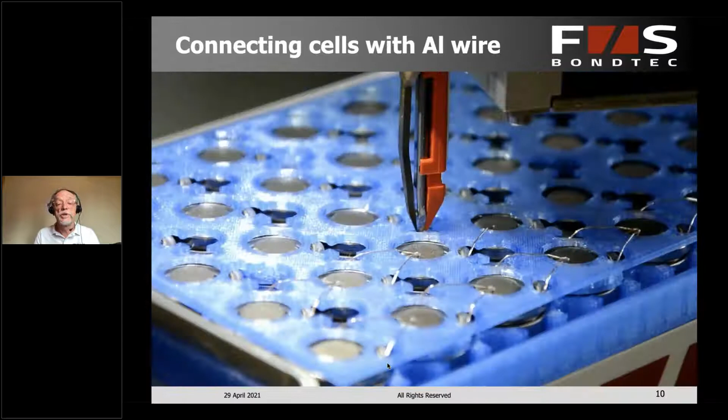recording shown here. What this machine does is almost a little bit like a sewing machine. We push down, make a wire connection to a second point and cut off the wire. And in the short times where this bond tool, as we call it, pushes down, we actually make the welding connection to, in this case, the battery top. That's the bonding step, as we call it.

Now, why are we so fond of wire bonding? Well, it's extremely flexible because you do not need a prefabricated connector of any kind. We just use the wire or the ribbon in whatever length and whatever orientation you need it. You just program the bonder to go from spot A to spot B, wherever that is. So if you have a different module to make or the design of your module changes, and those are typically things that happen as you start out when you have to make very small sample quantities, all you do is reprogram the bonder. You do not need to wait for extra parts or something new.

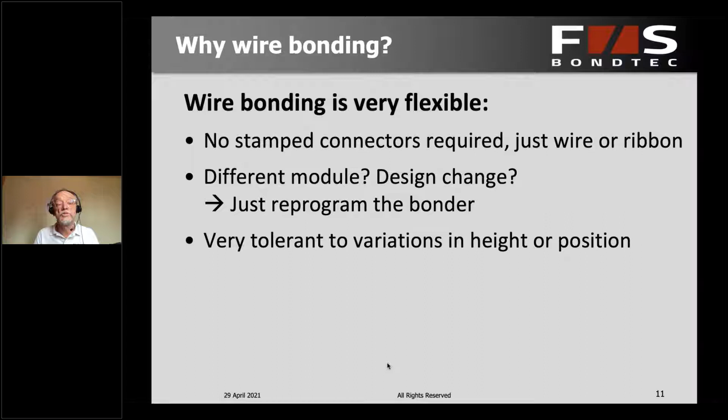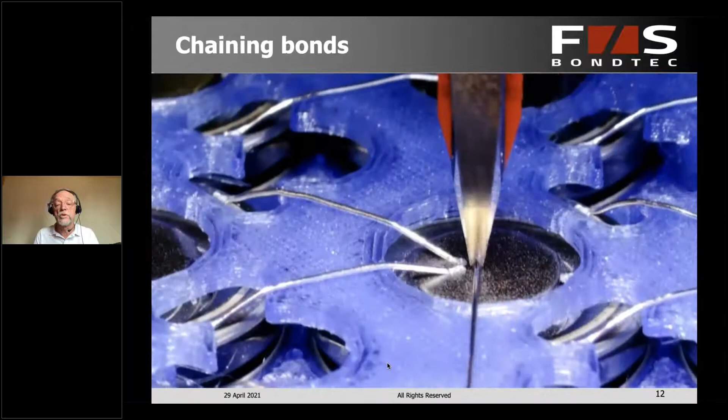Another nice thing is the machine and the process are extremely tolerant to variations in the position of the cells or also in the height of the cells, because the bonder will simply react to that by itself. What we see here is a chaining process. And as you can also see, we do not only connect a few cells in series, we can also make more than one wire, depending on the kind of current we want to conduct. So this is all very straightforward.

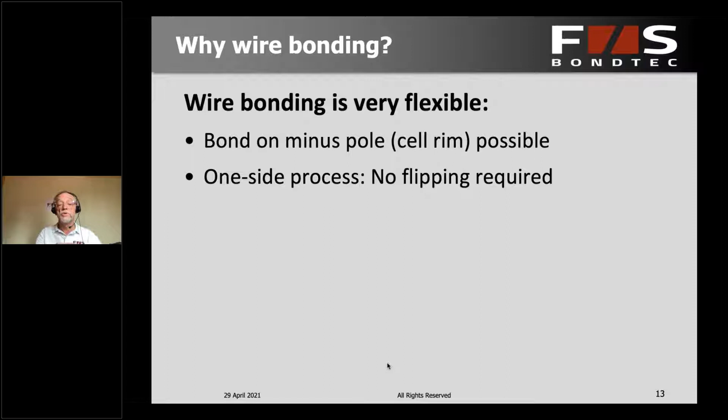You can even do things like making the second bond on the top side on the cell rim as well. So you can bond both poles on the same side of the module. And that is interesting because you don't have to flip the module around once you start it. You can also make a fairly low module because you only have connections sticking out on the top side. And the entire rest of the cell body is free if you want to do some kind of cooling or other thermal management. So that gives you extra design flexibility.

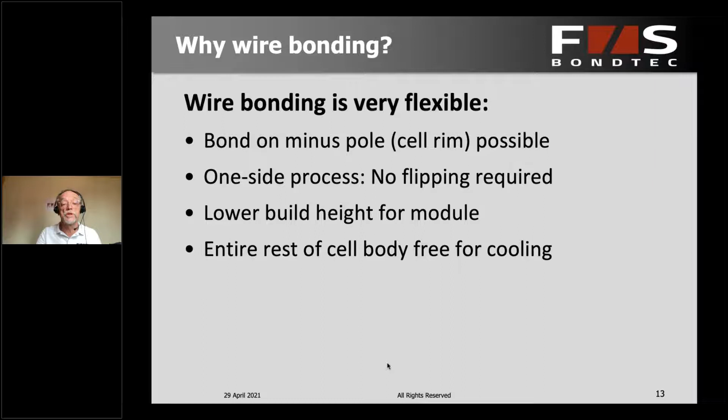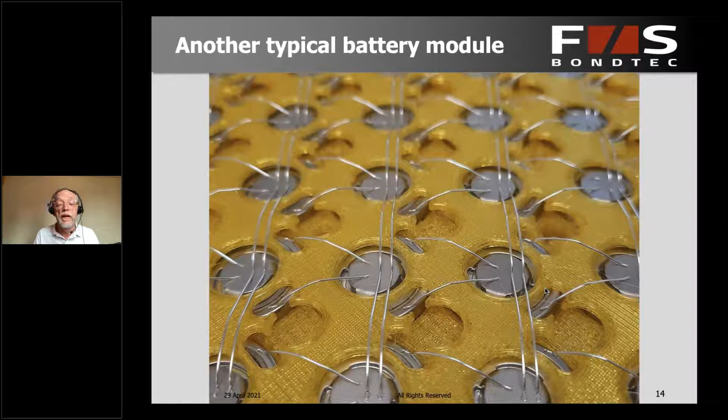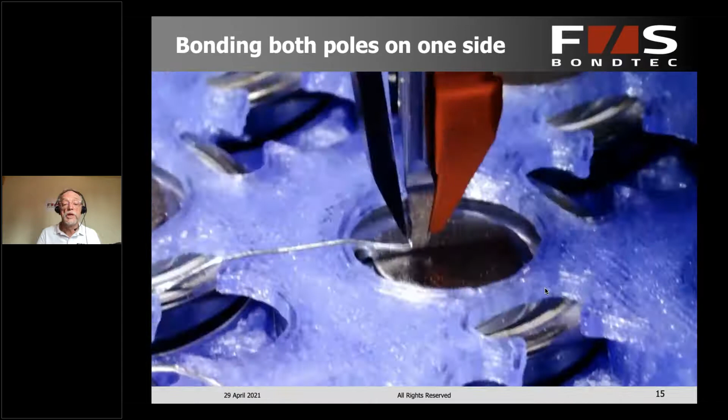In a case like this, where you can see another module that we've shown here, we have the two connections from the plus pole and an extra connection from the rim to a plus pole. As you can see here, you see the bond running from the rim to the neighboring plus pole. And of course, here we have a much smaller area where the bond has to go on the rim, and the rim is in addition bent and curved.

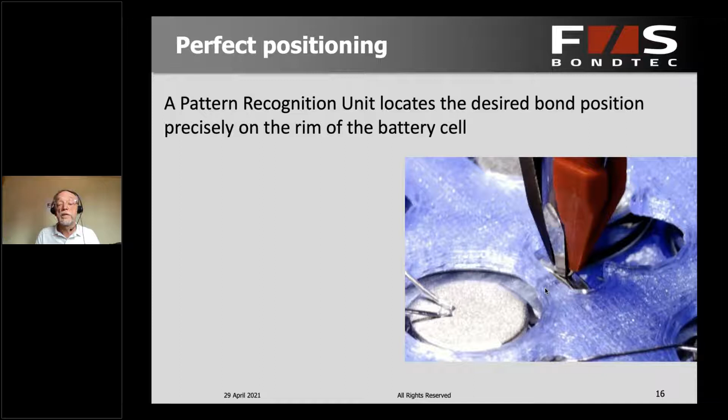But we can get around this problem because we have a pattern recognition unit in the bonder that allows us to locate the bond position very, very sharply and very precisely on the rim of the battery cell. In fact, if you look here on the left, you see the camera image from the bonder itself that shows us just what we are doing and where the bond itself is being located.

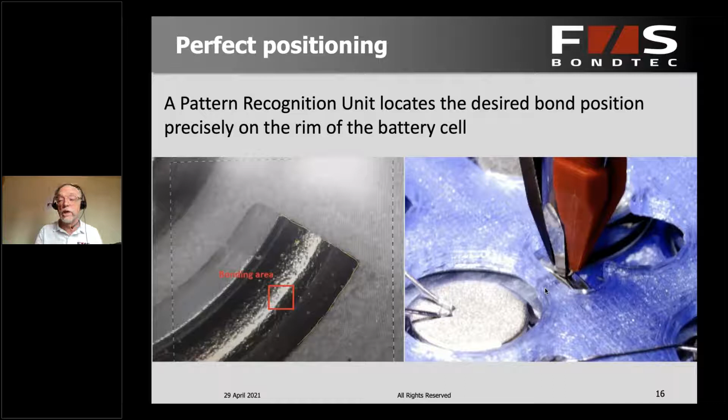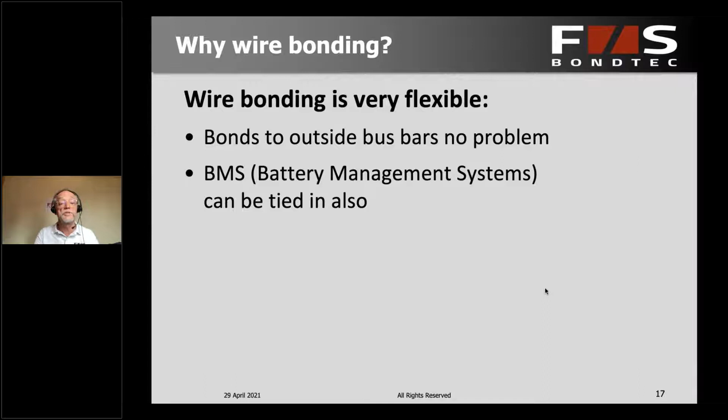So we can even bond, of course, outside the cells. We can bond to bus bars without any problems, or we could tie in additional circuitry like a battery management system that does not have to be at the same level. And here, as you can see, we can bond outside to a bus bar that will take the current off these plus poles. And you see we're making 2 wires each to get more current through.

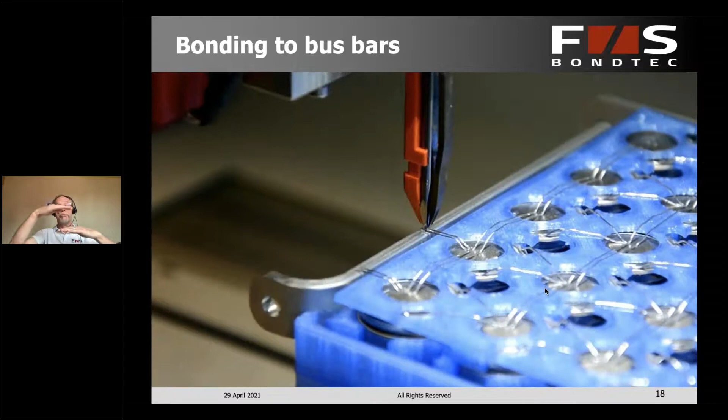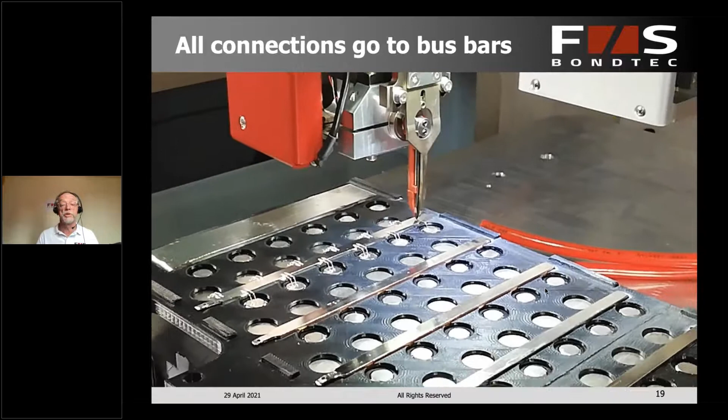A battery management system could be at a higher level above the battery cells. That's also no problem for a wire bond to get to. And again, no matter what the connection is, whatever the bonder can reach, you can bond to. Here you see a different type of battery cell module where we have only bus bars to connect to, not cell to cell, but bus bar. That's just a question of the design you like to use.

I was talking about the currents you can carry here, and indeed, if you use an aluminum wire, which is kind of a standard, most frequently used, of about 400 microns diameter, you have a fusing current of something like 25 amps in this case, and as you can see from the diagram to the left, this could be higher if you use different types of wire, such as copper or copper core wire. Typically, of course, you would derate the current well below the fusing current. So in our experience, a lot of people use something like 10 or 12 amps for a typical 18650 cell.

Obviously, if you want higher currents, you could use different materials. As I said, you could also use ribbons, or of course, the simplest way is simply to make more than 1 wire. 2 wires is actually quite frequently used, and that gives you the typical 20 or 25 amp current rating that you may need.

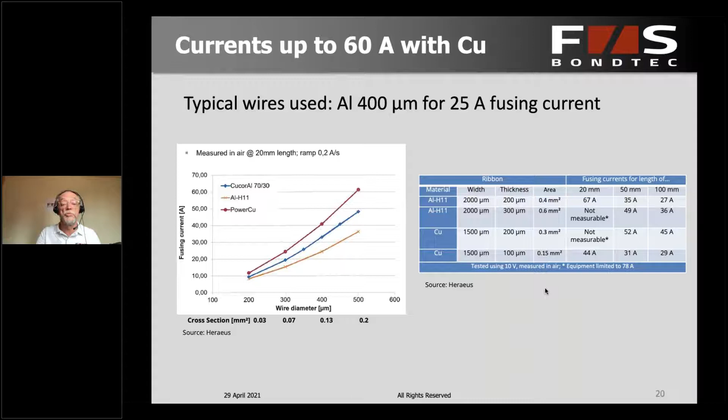Now, a little bit more about the technology. What's so advantageous about wire bonding and why is it so useful? Well, technically, it's a welding process that happens in the solid phase, and it happens by friction. So the crystal lattices of the wire and the substrate are brought into atomic contact and form a metallic bond without any molten phase. That's the important thing to remember.

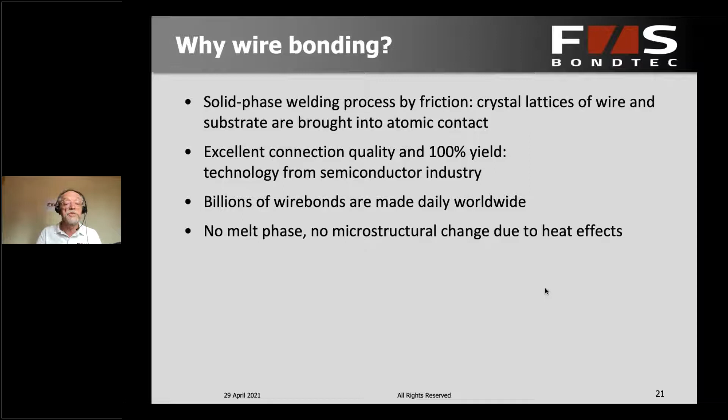The connection quality is really, really excellent, and typically we have a first pass yield of 100%. That's not so surprising because the technology really comes from the semiconductor industry, where extremely high quality and high yields are just the basic requirement. Billions of wire bonds are made every day worldwide, so this is a huge industrial process that's very well understood. As I was saying, we have no molten phase, so we have no microstructural change inside because of heat effects, and that's a big advantage.

But we also have a bulk joint. We have no interface between the two materials that could corrode or get contaminated. It's really corrosion proof, and that's why it easily lasts 20 years. In fact, in your regular car, you have several hundred wire bonds with this type of heavy wire in the electronic systems that will easily last many years. And as an additional bonus, if one of your cells fails, you can easily replace it because they are repairable.

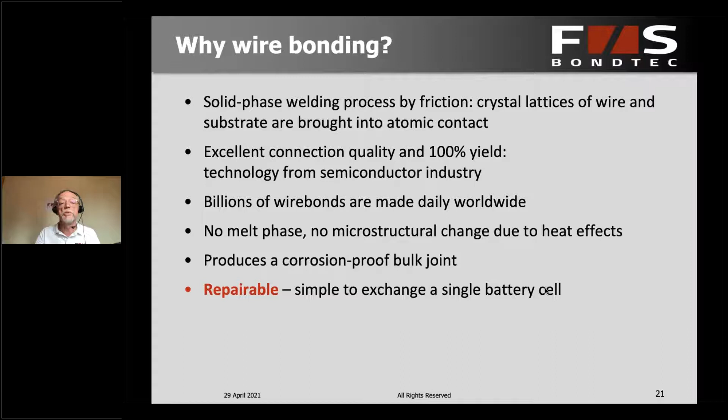So that's the reason why, for e-vehicles, at least for those with cylindrical cells, just like Tesla's, wire bonding is by far the most popular connection technology. It's also quite fast, as you saw from the videos. The typical connection speed is something like 1 second per wire, and it's relatively cheap. Depending on the volume, you could count on something like a cent or so per wire connection, depending on the length of the wires and so on. But that's a good rule of thumb to use.

Now, of course, there are other methods. I won't go too much into detail about what's good about them and what's not so good, but resistance welding is really a classical starting technology if you start out small, because you can start with a manual entry-level solution quite easily.

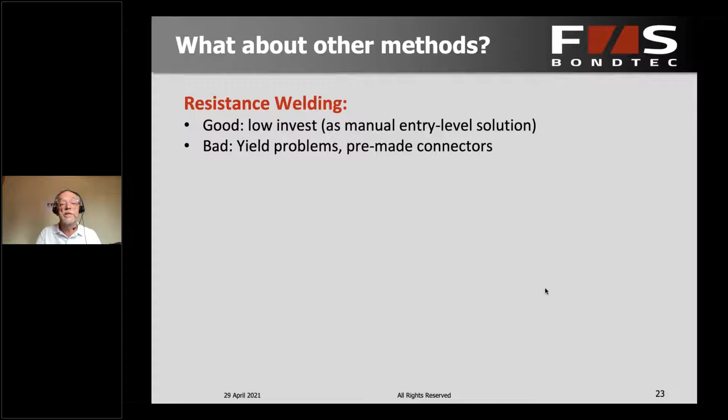However, you typically always suffer from yield problems. You do need pre-made connectors. Laser welding, you've heard a lot about also in the previous presentation. It's really good for the connection quality, and it's very, very much used for high currents because you can have a much larger cross section of the connectors in laser welding.

But the drawback is, again, it's quite an involved technology. The initial invest is rather high. So if you start out in this business, it can be daunting to have such a high investment. And you are much more sensitive to height variations between the connectors and the cells because you're really dependent on the welding gap. You also have a thermal load because this is a real welding process with a molten phase, so you have to worry about that.

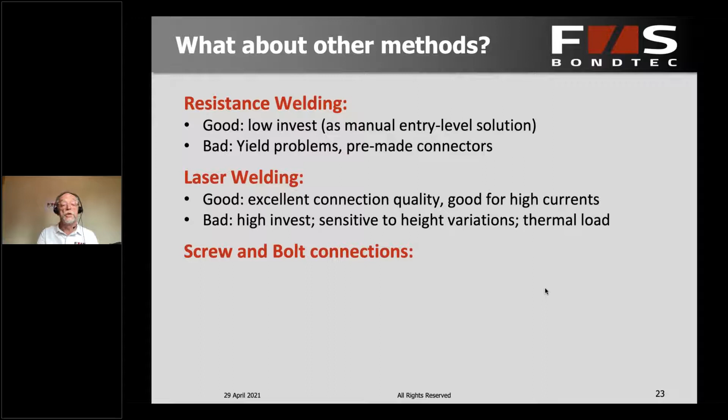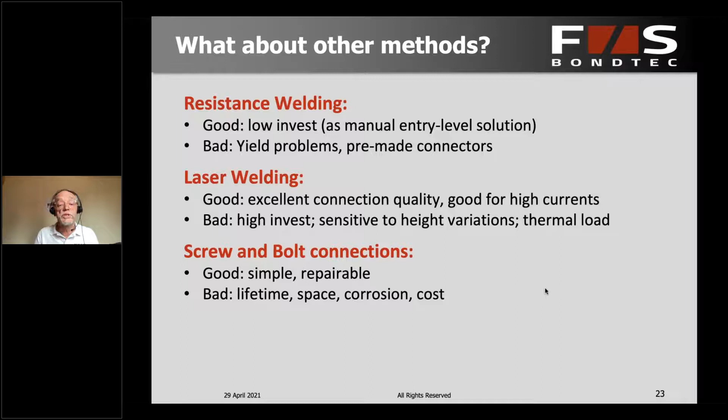Classically, you also have screw and bolt connections, which are very simple and very straightforward, but in large numbers, you don't really want to use them because the lifetime in terms of corrosion is a problem. It's also relatively costly and it takes up a lot of space.

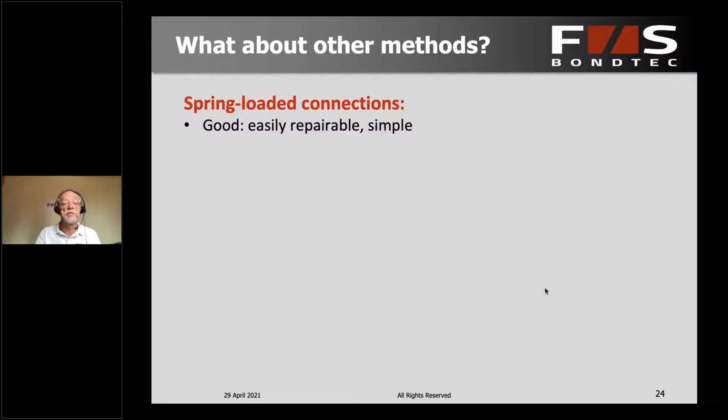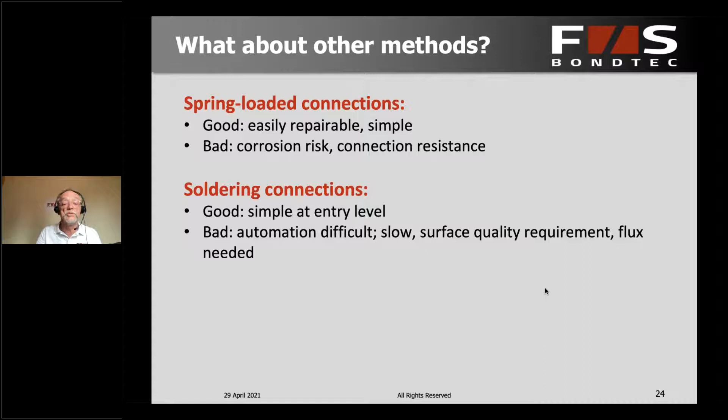Finally, spring-loaded connections is, of course, what you know from your TV remote or any kind of battery-powered typical device. They're easily repairable because you just snap out the cells and put it in. They're quite simple, but you also have a major corrosion risk, and the connection resistance will change over time. Finally, soldering, of course, you can also do that. At entry level, it's relatively simple, but it's really difficult to automate. It's quite slow, and the surface requirements are really much higher.

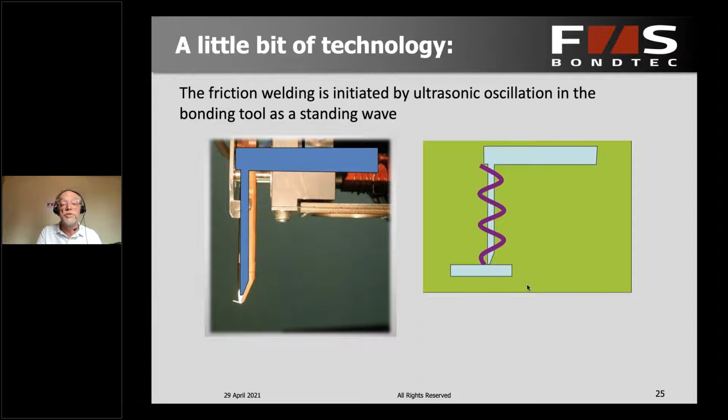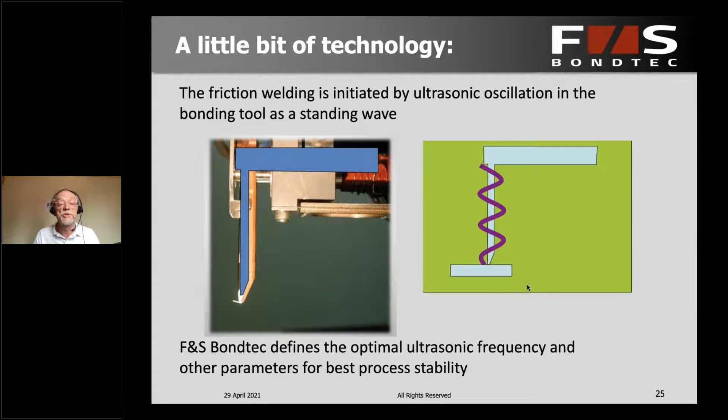To go a little bit further into technology, what you see here is really the business end of our bonder. Friction welding is initiated by an ultrasonic oscillation in the bonding tool, very much like a standing wave here. So we need a very precisely defined resonance frequency to run all of this, but this is really our job. And once the process is all set up, then we have an extremely stable and extremely robust process that for you is just a question of switching on and switching off.

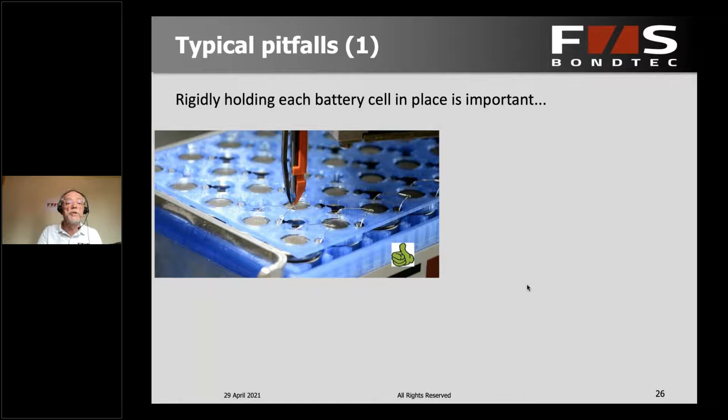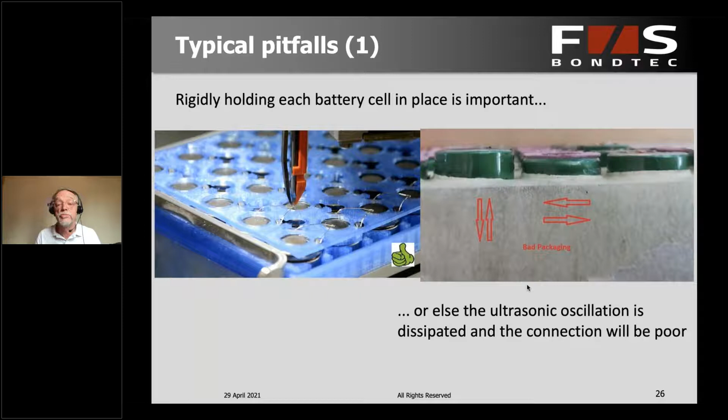There are, of course, technical requirements, to name just two of them. What can go wrong will go wrong, as Murphy would say. And what we have to worry about here is that the parts have to be held quite rigidly, so the friction really works off each other. So if you have parts that are held softly, like you have these cells in a felt package on the right, the oscillation will dissipate and the connection won't be as good.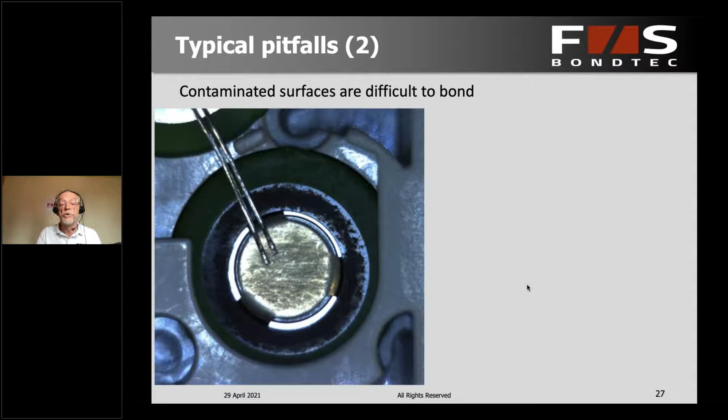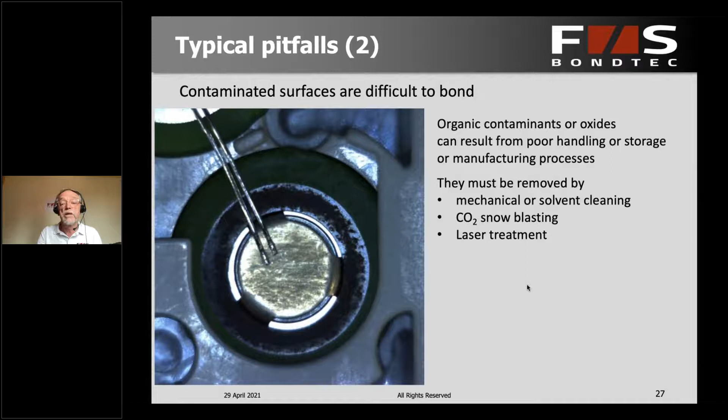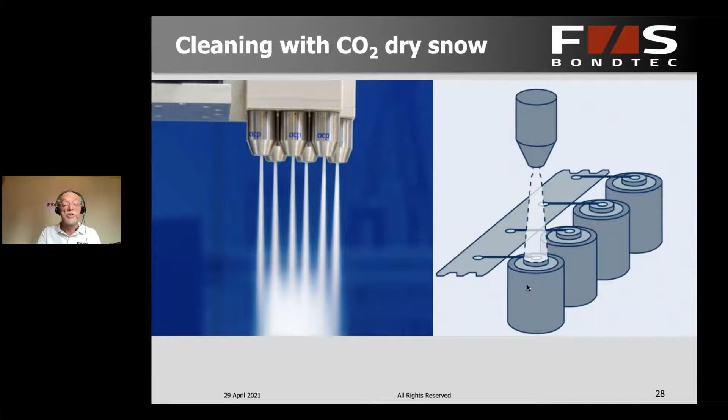Second problem that can happen is that the surfaces are contaminated with all kinds of organic or oxide contaminants, which you have to get rid of, not to kill the process. And that's typically removed by mechanical or solvent cleaning, laser treatment, or CO2 dry snow blasting, which is a process we rather like. You blast dry CO2 snow, which is very easily generated just by blasting it out of a jet. It takes less than a second per spot, and immediately you get very, very clean surfaces. You see before and after cleaning with snow.

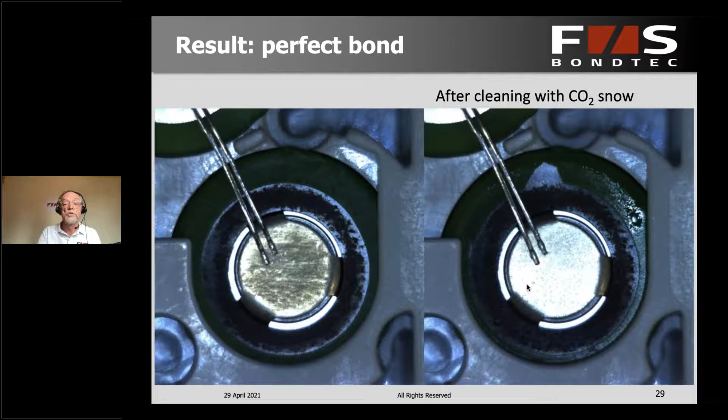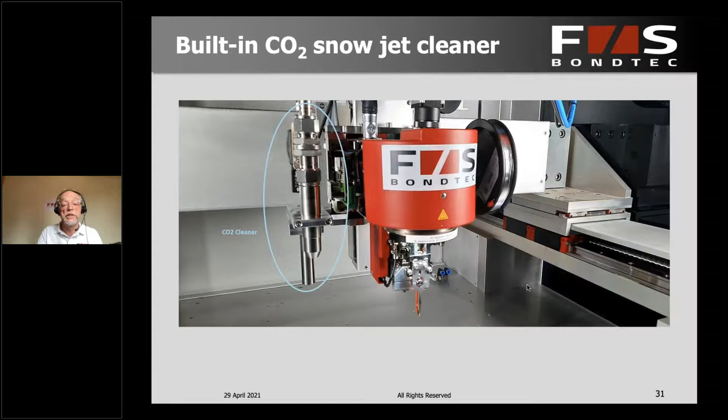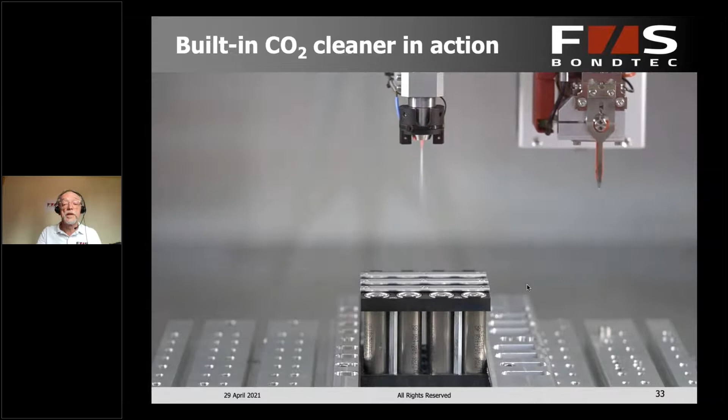This cleaning could be done in a dry snow jet setup manually, or we could even put the snow cleaner right on the bond head, next to the bond head itself. And as you can see here on a small 16-cell assembly, we run the cleaner, here comes the jet, we run it in an optimized pattern across the surfaces. You see this works from a distance. It takes something like 12 seconds for the entire 16-cell batch, and we're done.

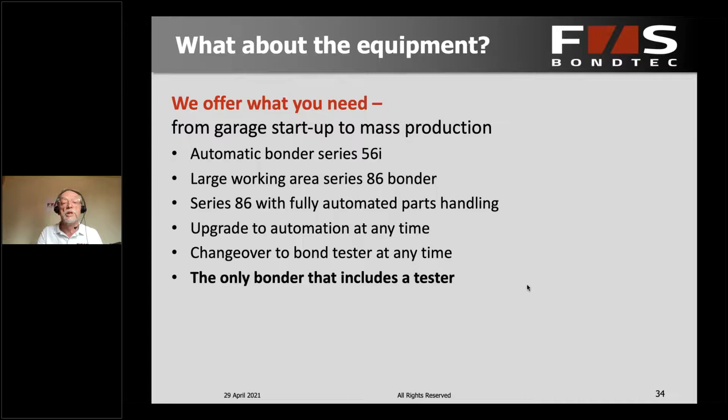Now, the equipment you need is what we built. We have a whole range of equipment, starting out with an automatic small series bonder to a much larger working bonder as well with automatic parts handling. And what's attractive is you can change to automation at any time. So you don't have to know what you need when you buy the machine the first round. You can add on later on at any time. And you can even put a bond tester in the machine. And we are really the only manufacturer who offers that.

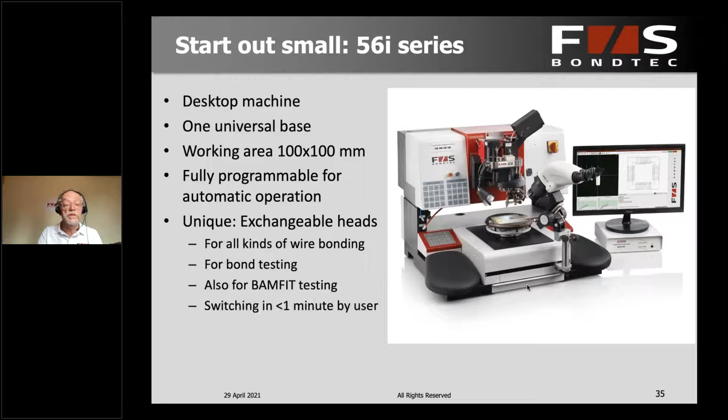This is what the smaller machine looks like. It's a desktop machine. It has exchangeable heads for all kinds of different bond technologies, so not just for heavy wire bonding. You can also put in bond testing, even the fairly new BAMFIT test, which I won't go into here, which is a lifetime test, and it can easily be switched.

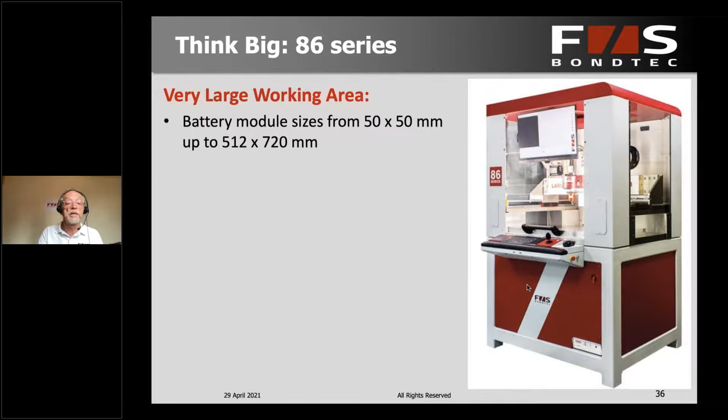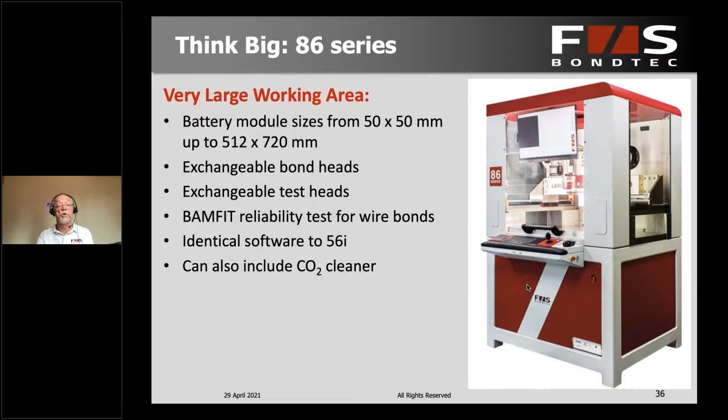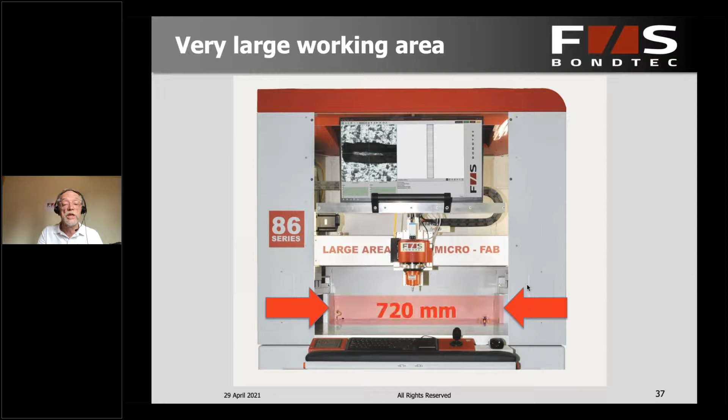Here comes the larger machine with the batteries that can go all the way up to 500 by 700 millimeters inside the machine. Again, the bond and test heads can be exchanged, and it already has the same software as the smaller machine that we had before. Plus, it can include the CO2 cleaner, the dry snow cleaner that we just showed before. Here is the working area of the machine, so you could put many different parts in there, or just have very large parts in there.

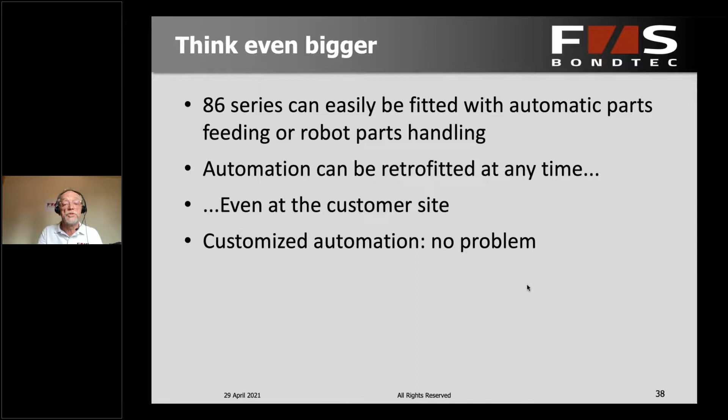If you need to go even bigger, of course, you can automate this retrofitable at any time, even at your site, or a customized approach. Just a short aside about bond quality: as I was mentioning before, there are two tests that are typically done, the pull test and the shear test. Both can be done on the equipment.

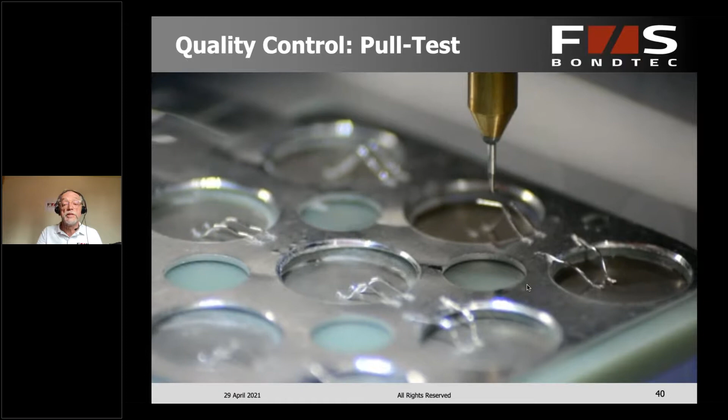Here is what the pull test does. It just pulls a wire up until either the wire or the connection breaks and measures the force at which this happens. This is a standard test in the semiconductor industry, which is very well established and is an excellent way to start your quality control.

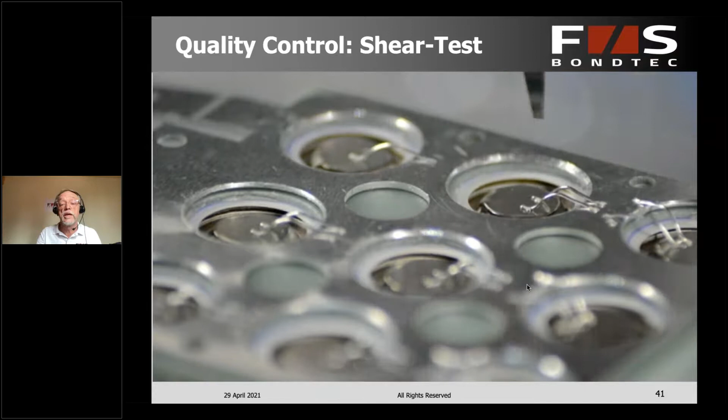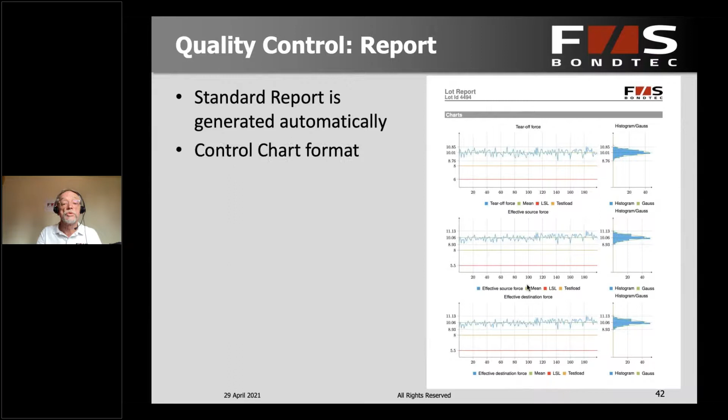The second test is called a shear test. There you do not pull on the wire, you actually push at the connection itself, and again measure the force at which it fails to give you a quality control measure. And of course, like in any quality control thing, you get a report out of this, which comes out automatically. You get a control chart, measurements, trends, distributions, CPK values, and so on, and also customized reports.

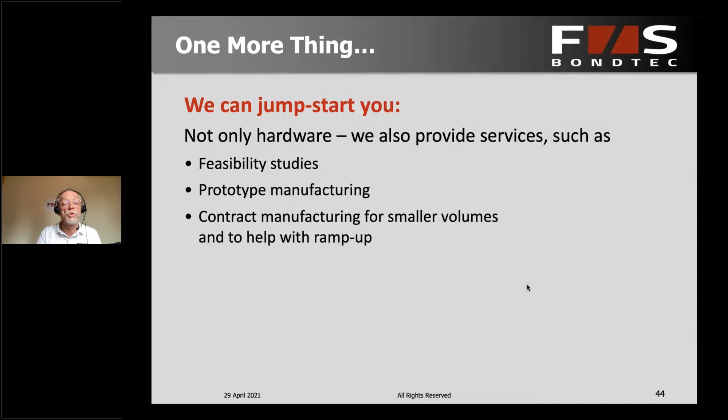One more thing: before you even get to the point of needing equipment, we can jumpstart you before the hardware. We help you with feasibility studies in getting your product defined and worked out. We can help you with prototype manufacturing, even up to small volumes that we do in contract manufacturing, to help you get into the market or acquire new customers, and to help you, of course, with the ramp up.